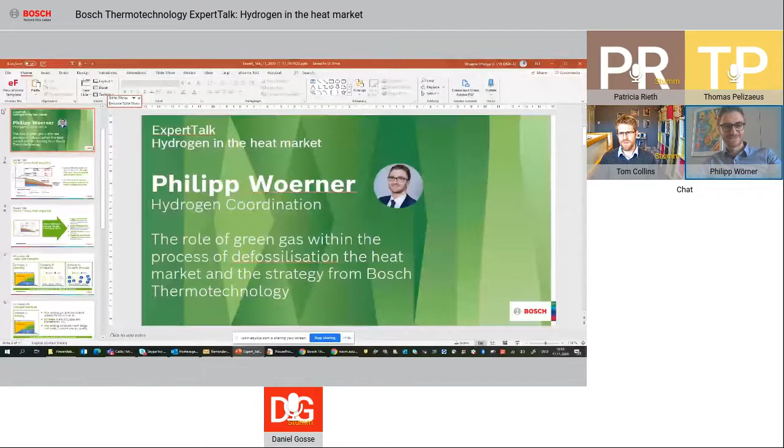So now it works. Yeah, I'm having the pleasure today to give you a little introduction into the role of green gas within the process of the defossilization of the heating market, and our special corporate strategy on it.

Let me start with the current Green Deal target line. On the screen you see now the current enacted target from the European Commission, from currently minus 40% to now minus 55% in terms of CO2 emission reduction compared to the emissions of 1990.

This new target setting has a significant effect, especially on the individual sector targets. In the middle you can see the new target setting now for the industrial and also for the residential segment. This means that the current activities, as we have defined for new build and also for renovation of existing buildings, need not only to be massively increased, but now also need to be accelerated at the same time.

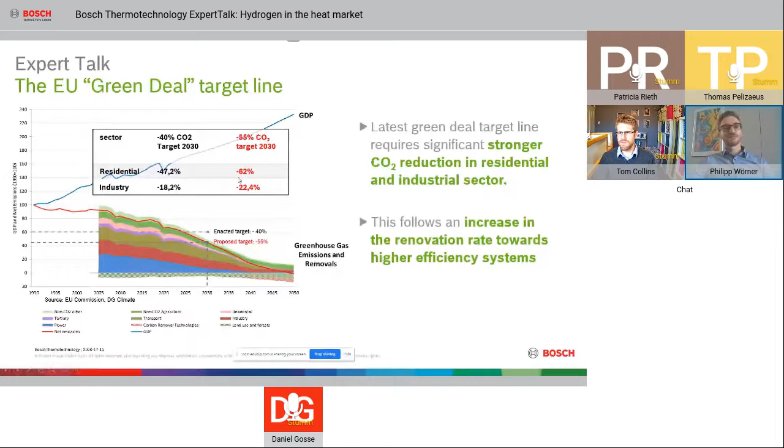Next to massive speed in the expansion of the capacity of the electrical grid, and of the demand to cope with the demands of space heating, industrial applications, and mobility, green gases, especially green hydrogen, have a great opportunity as a second energy carrier to be an active contributor in the decarbonization pathway.

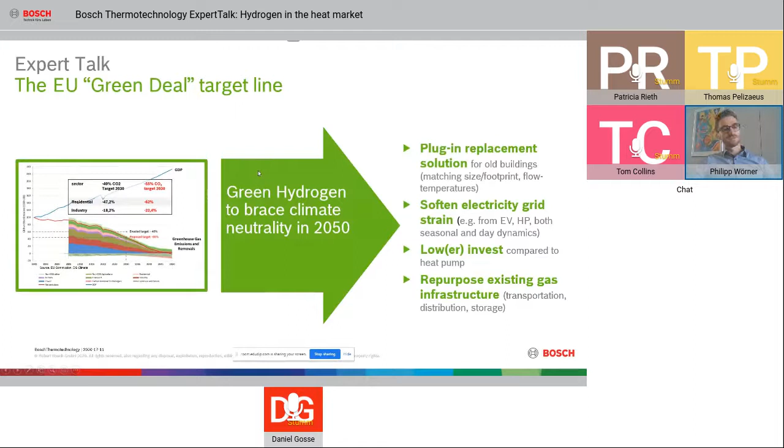Why? Renewable gases such as hydrogen can be used to decarbonize existing buildings, to enable an optimized use of the existing energy infrastructure. And we are able to offer plug-in replacement solutions, especially for the renovation of old buildings.

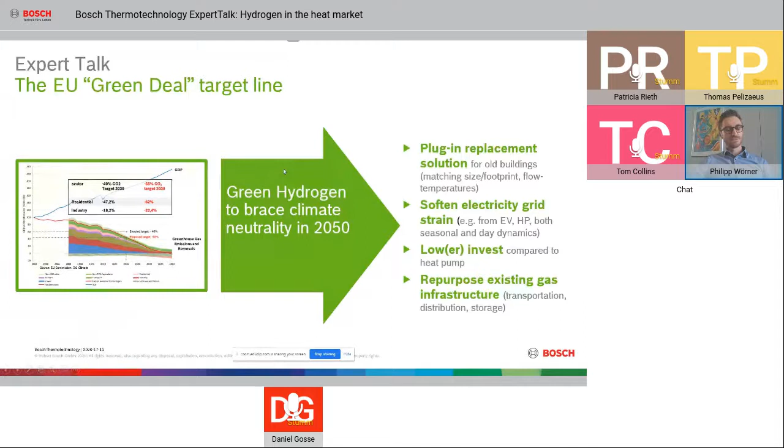Next to that, the repurposing of the existing gas infrastructure—here we're speaking not only about the end use, it's also transport, distribution and storage of green hydrogen. It offers a great opportunity to soften the electrical grid strain, especially at times of low wind and sun. On this slide, I want to give you a little overview.

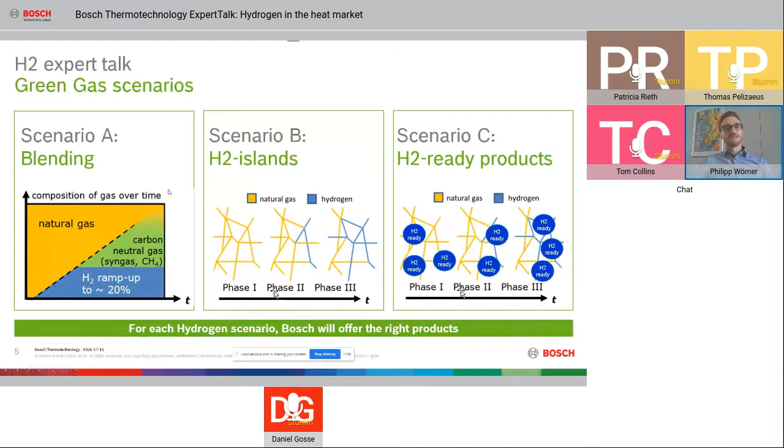How can we make use of green hydrogen or green gases within our industry? Let's start from the left to the right. Scenario A is the most simple one: you take the available hydrogen and mix it, like a cocktail, into the existing gas grid. Over time, you can increase the share of synthetic gases and biomethane plus hydrogen, becoming more and more carbon-free. The great advantage is we can use the existing combustion technology and certify it against the new gas quality.

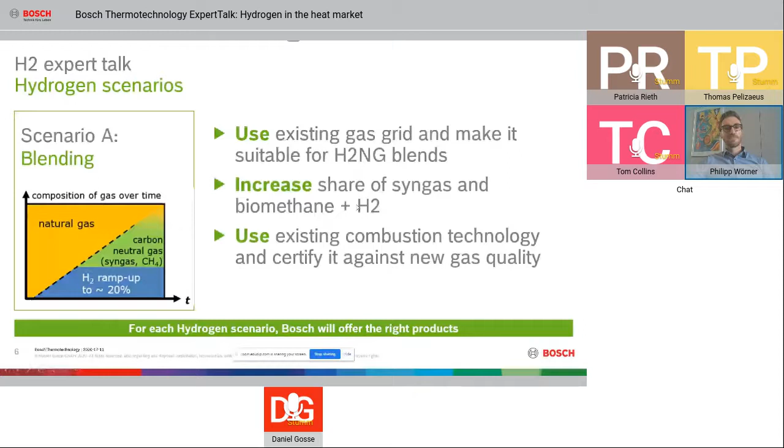In scenario B, we speak about so-called hydrogen islands. Here, a successive upgrade of existing gas grid sections takes place, converting them to local hydrogen networks. Over time, these islands are increased and enlarged step by step until we have a fully CO2-free area, and later the full market. The key challenge is that you have to absolutely synchronize, at the same moment, the hydrogen supply availability and the gas end-use installation. So everything has to be prepared together.

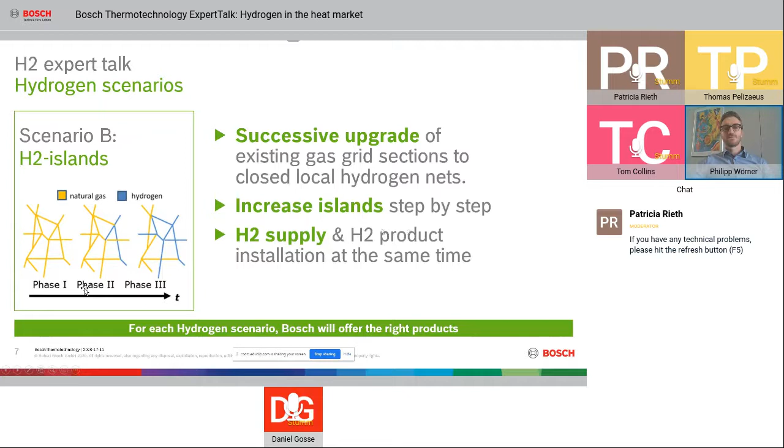Last but not least, scenario C—the so-called hydrogen-ready scenario. This is very important: the appliances are new technology, designed and released especially for combustion of pure hydrogen, but when installed in the field, they are converted to a natural gas setting. The great advantage is you have time for the grid and the hydrogen supply to be phased up, ramped up step by step. Then, when hydrogen is available in front of the door and the installed stock is prepared for hydrogen readiness, these boilers are simply switched.

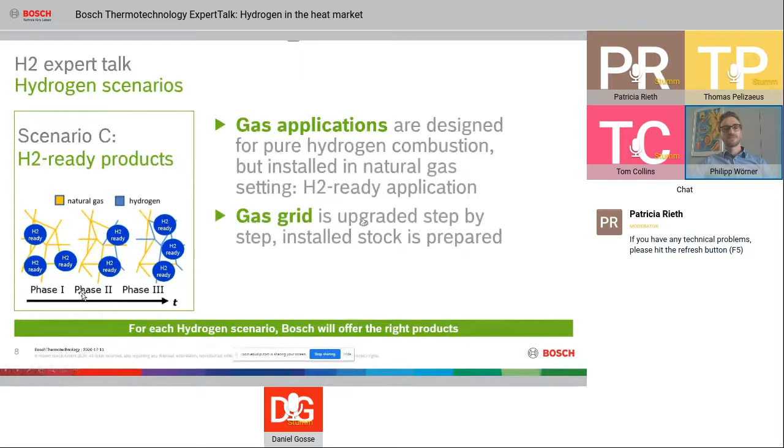Nevertheless, in all three scenarios, there is currently no clear winner yet in Europe. That's why we, as Bosch Thermotechnology, will offer the right products for all three scenarios at the right time. Let me show you now with this picture what plans we are following.

You see in the upper left corner the path of blending, mainly scenario A. I'm happy to tell you that even our installed products today, when younger than 1995, are already able to work with up to 10% hydrogen blends, so you can start decarbonization already from today onwards. Our modern combustion technologies are now, in the next step, certified for 20% hydrogen blends—so our next generation of products will be certified for that 20% hydrogen level.

Next to that, we will follow in parallel the path of pure hydrogen. Here you see directly a difference between countries, and yes, this is right: the UK is a little bit ahead of the rest of Europe. This is mainly because there is a huge interest based on the availability and capacity of the electrical grid, to have higher flexibility, which pure hydrogen could offer.

Therefore, we are participating in the public demo project Hy4Heat, and within this we also want to launch our first product range in 2022 with a small quantity. In response to a possible legislation change in 2025, we are aiming to launch a product range in hydrogen readiness as well. Looking more broadly at Europe, we see this step coming for 2030. We're working in parallel to prepare the certification pathway for certifying hydrogen-only boilers and hydrogen-ready products.

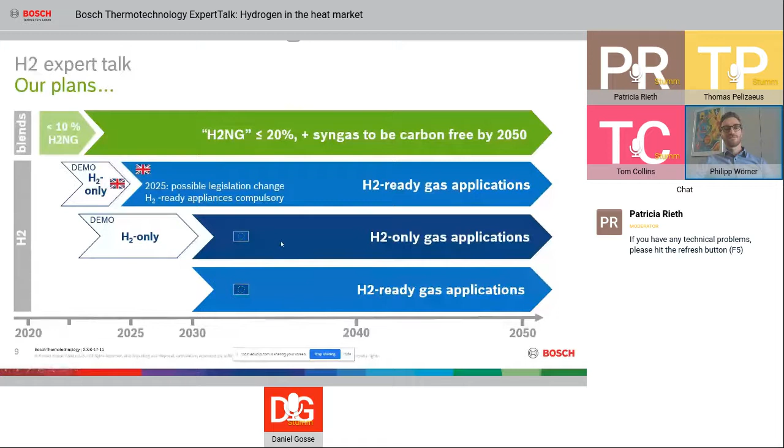But now, coming from this quite dry picture of our plans for the future to what we have actually already achieved, I would like to hand over to my colleagues. Thank you very much for this first introduction.

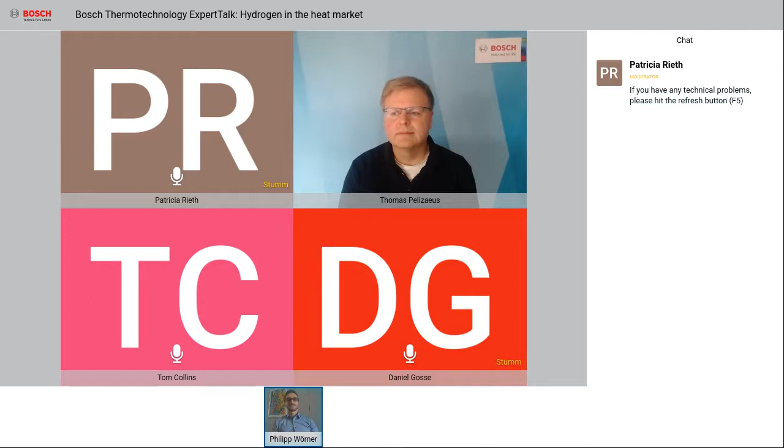I think we will later see in particular what the effect on the products will be. But let me start from this point: the hydrogen-ready concept is based on the fact that you can change the combustion setting from pure natural gas to hydrogen with just a few working steps, exchanging the burner and some software parameters. This will, in the end, determine the delta cost. But it's not yet clear whether these delta costs have to be covered by the end customer or by the local distribution grid operator.

Okay, thank you. We have another question. Is there any concern regarding introducing hydrogen to an aging, and maybe also failing, supply network? How long will it take to update the networks?

This is a question which we as Bosch Thermotechnology cannot answer from our perspective. We can just give our position: there is currently a lot of effort necessary. The grid in Europe as it is now is not fully prepared for 100% hydrogen, nor do we currently have the amount of green hydrogen available. But it's important that someone makes a start, otherwise we stay in this chicken-egg circle for much longer.

That's why our clear strategy is to provide the gas end-use side ready for hydrogen, and then give the other side, the gas supply side, the chance to upgrade the grid and produce enough green hydrogen so that we are able to use it and really start to decarbonize.

Okay, thank you Philipp. So then let's now turn to the use of hydrogen in residential applications. Tom Collins will share his experiences from the UK. Please go ahead, Tom. Thank you very much, Thomas.

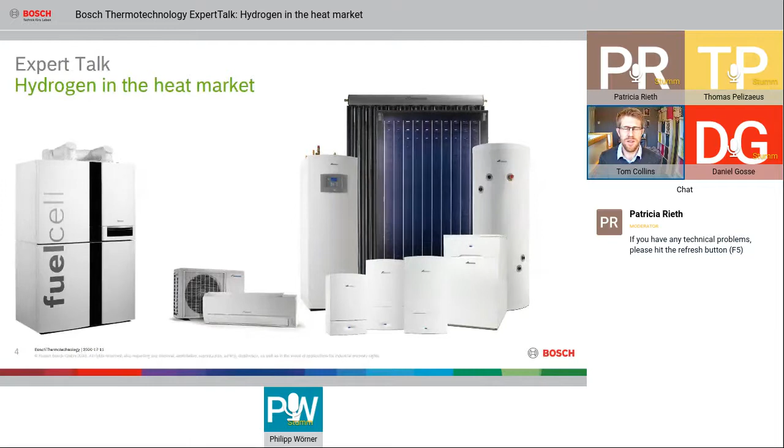All of these influences, plus capital outlay and uncertainty about how a system might perform, mean that despite our best efforts as Bosch to introduce heat pumps to the UK market, we've really struggled, and consumers still continue to choose boilers. This has been a pattern we've found ourselves in over the years trying to decarbonize heat in the home, and we still unfortunately just sell boilers. So the UK finds itself a little bit stuck. We can't live with gas and its emissions at the point of use, but we can't live without it at an end-use level, and also with some challenges at the energy system level.

This all changed back in 2016 when a report called Leeds City Gate was published. This was a desk study, a theoretical study, working out if it's possible to convert a large city, in this case Leeds in the north of England, from natural gas to hydrogen. The idea had been proposed for years beforehand, but normally dismissed almost immediately. But this report was a real game changer because it showed that actually it's feasible, if you model the impact on the network, the zoning of the network, and the materials present in the system.

That's partly because the UK, unlike a lot of Europe, has started replacing its iron gas mains with plastic, continuously welded polythene pipelines, and those are far more suitable for hydrogen than the old iron pipes.

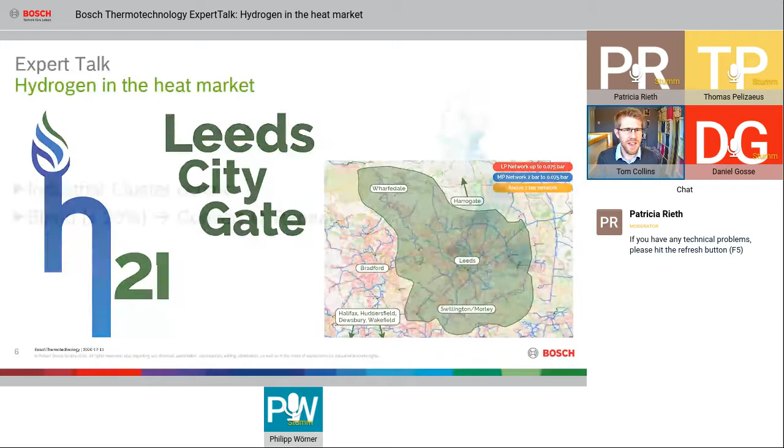So an emerging proposal in the UK is to start doing these conversions in large cities, working out from industrial clusters where hydrogen would be onshored, either produced or imported.

Key to this is blending. Blending doesn't just help you reduce the carbon intensity of gas early on. It also allows you to break the chicken and the egg problem in building large quantities of hydrogen production, because blending gives you somewhere to immediately start selling and using the hydrogen that you produce. Once you've built up enough production capacity, you can convert a region of the grid, transfer that hydrogen production capacity onto that new dedicated region, and then start again building more capacity. So blending is a real key technology, not only for showing early reductions in carbon intensity, but also for allowing us to break the chicken and egg problem in building large scale hydrogen production.

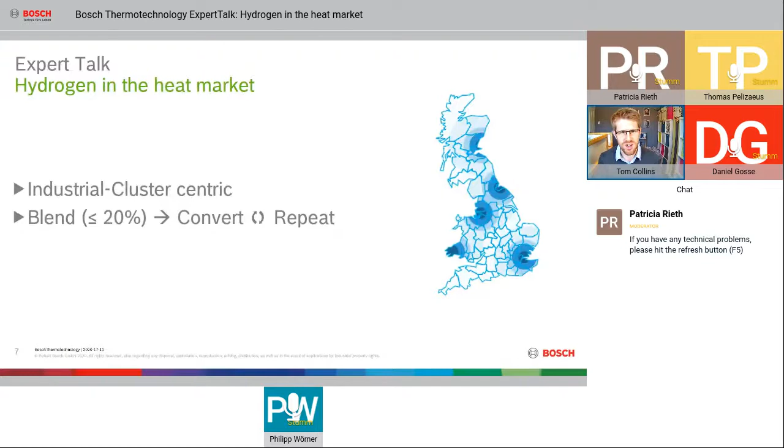The UK iron mains replacement programme not only means our network is very well suited for conversion, it also means some of the costs of a hydrogen conversion will already be dampened by what bill payers are already paying to cover this iron mains replacement programme. So the impact on bills of that Leeds project, for example, would have been just £10 a year for the end user to pay for that conversion.

It's not particularly surprising that the UK finds this a much easier prospect than other European countries. In the 1970s, we converted our entire gas distribution network from Towns gas, which was 50% hydrogen, to the North Sea natural gas that we're using now. So in a sense, for the UK at least, switching to hydrogen is a little bit like going back again. We're going back to the future.

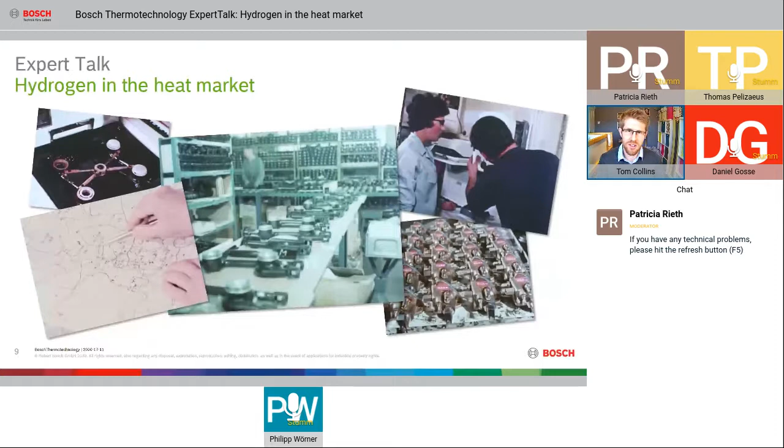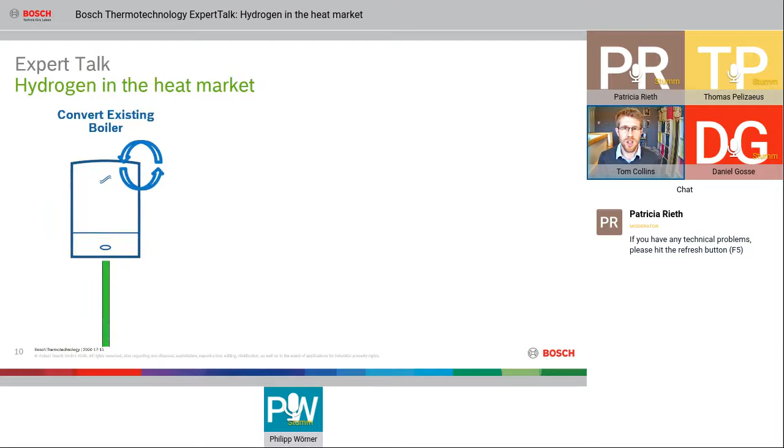So how do we go about this conversion, particularly in terms of technology? Well, the UK government, when they first started consulting on this, proposed three different methods of converting appliances. The first was what we did back in the 1970s: change a few parts in a boiler, and once those parts have been changed over, the boiler can burn the new hydrogen gas. For some reasons I'll explain shortly, that's not particularly possible.

The next proposal was actually what was modelled in that Leeds report, which was to simply replace the boiler with a new hydrogen boiler at the point of conversion. Now the macroeconomics of that, maybe surprisingly, are still quite attractive. But if you look at the impact on a local level, if you suddenly renew all the appliances in an area, the small one-man-and-a-van operations currently installing, servicing and maintaining boilers would really struggle if we suddenly renewed the whole population in one summer in their local area. So not so attractive locally.

The third option the UK government proposed was to build boilers you could convert across to hydrogen almost automatically, at the flick of a switch. Again, that's perhaps a little technically optimistic at this stage. So we had three ways of doing this conversion that seemed like good ideas, but none of those options worked very well.

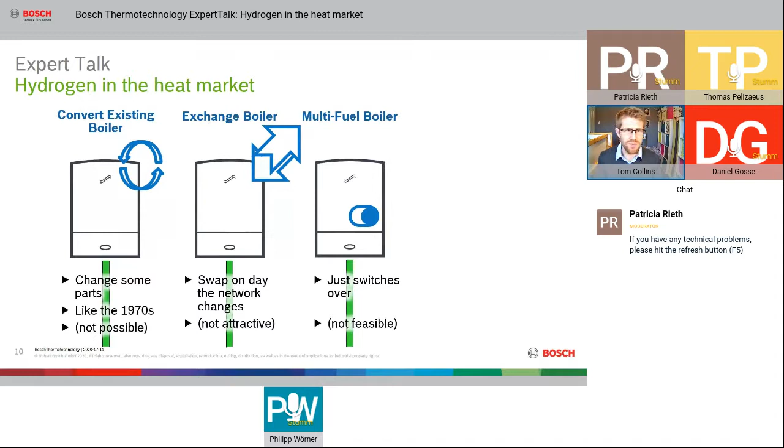All credit to the UK government, when industry proposed a fourth method, they went out and reconsulted on it. That fourth method was to build a boiler that's essentially a hydrogen boiler, but back-convert it to natural gas in the factory, and sell it as a natural gas boiler that's hydrogen ready. That boiler can be converted just like we wanted to in the first place, by just changing a few components. So hydrogen ready, that definition of hydrogen ready appliances, seems to be the one that's got traction.

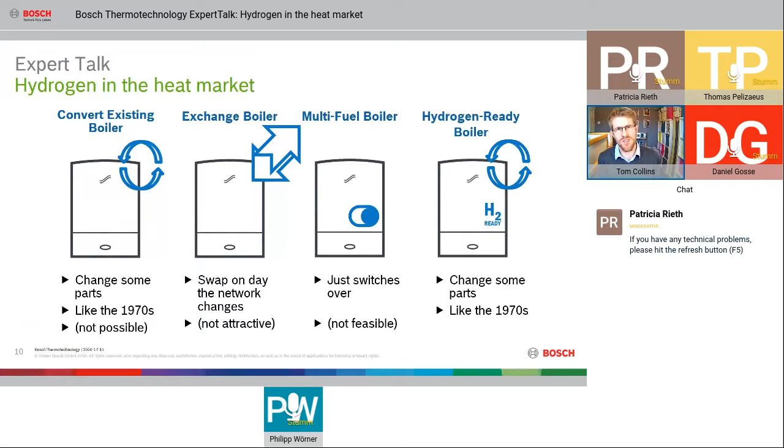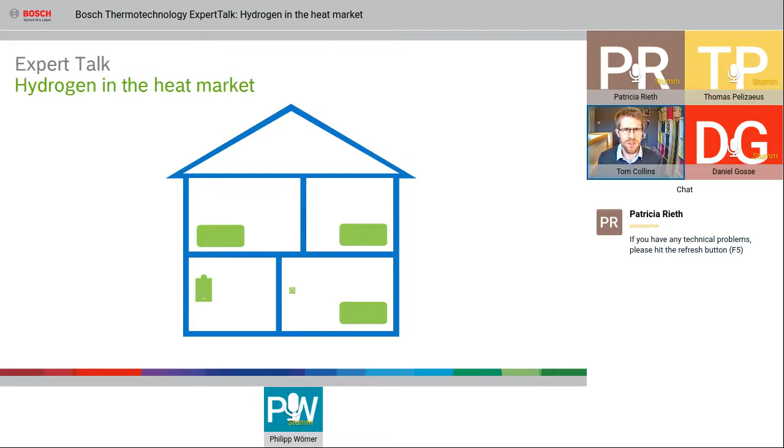It allows us to build the cost of the technology change into the natural life cycle of the appliance. The parts that would be changed would probably be the burner, maybe something associated with gas mixing, and maybe some kind of coding for the boiler to know what gas it's burning. Our life cycle replacement programme makes this look really simple. When your appliance naturally reaches end of life, you replace it with a hydrogen ready, direct like-for-like replacement appliance. And when the day comes that your gas pipes are changed over to the new gas, a few components are changed in your appliance in an operation that would perhaps take less than an hour, and your house is now burning green hydrogen. So what's inside a hydrogen ready appliance?

For us, we've used our modular architecture of appliances that we have at Bosch. And so most of the boiler stays completely identical to a natural gas boiler.

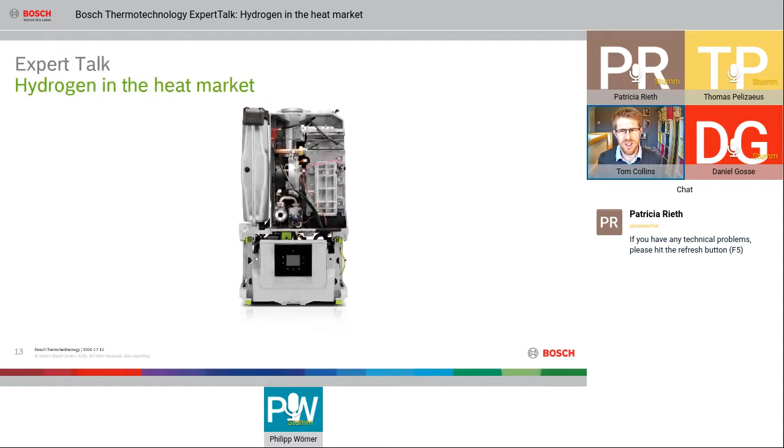Where the changes happen are just in this module here, where we burn the gas and air mixture together. Inside that module, we've made a few changes, and we've faced a few interesting challenges around hydrogen. I'll take you through just a few now.

The first one is how you burn the gas. So this is the burner. This is the heart of a modern pre-mixed appliance. And here is a flame.

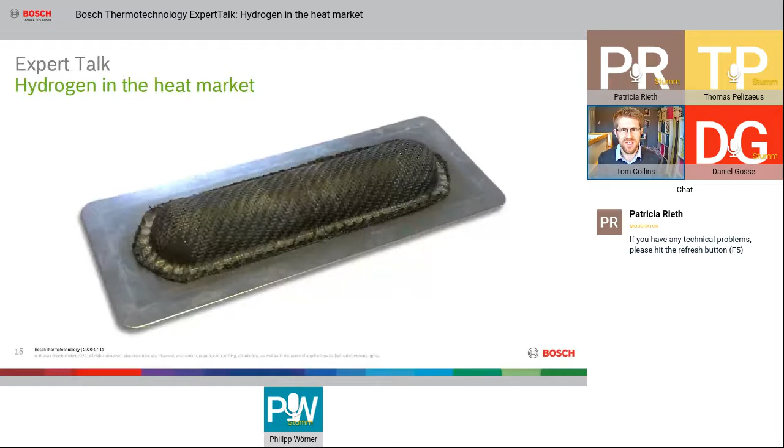If you look carefully at one end of this flame, ready, steady, now, you may have noticed the flame got shorter, and the burner started to glow a little bit brighter. Have another look at the flames at one end. See if you can see them go shorter now. And you may have noticed the burner deck started glowing.

What's happening here is that hydrogen has a higher flame speed than natural gas. So the flame is burning against that flow of products through the burner faster. As you get a gas with a faster flame speed, the flames burn closer and closer to that burner surface, as they're able to outstrip the speed of the gas squirting through that burner.

If we introduce much more than 23% hydrogen, as we've got here, perhaps above 50%, the flame would be able to propagate back through the burner. It would win the race against the flow of products through the burner, and you'd light the mixture of air and gas upstream and create a kind of pop. That's called a flashback. It's a bit like a car backfire. It's not dangerous, but it's something we have to avoid.

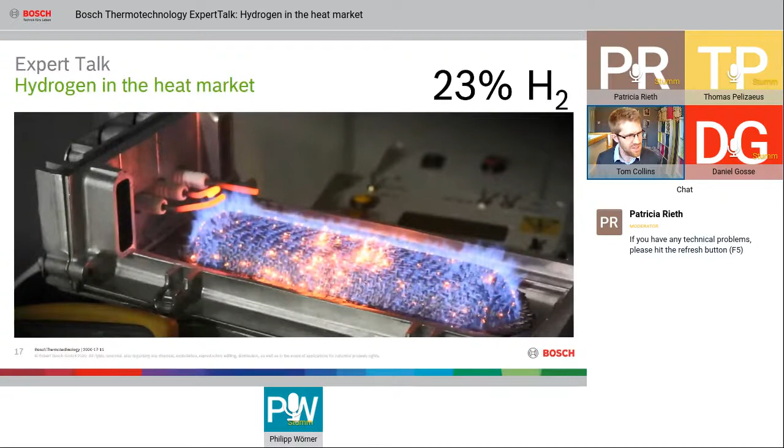So that's one challenge that we've overcome in our hydrogen appliances. Another really interesting challenge is how you detect a hydrogen flame. In a natural gas appliance, we detect it electrically because the flame conducts an electrical current, but hydrogen doesn't do that. Hydrogen flames are also, incidentally, almost completely invisible.

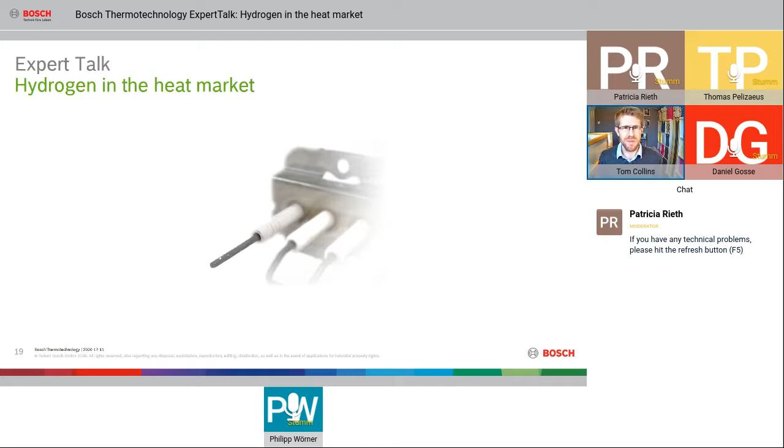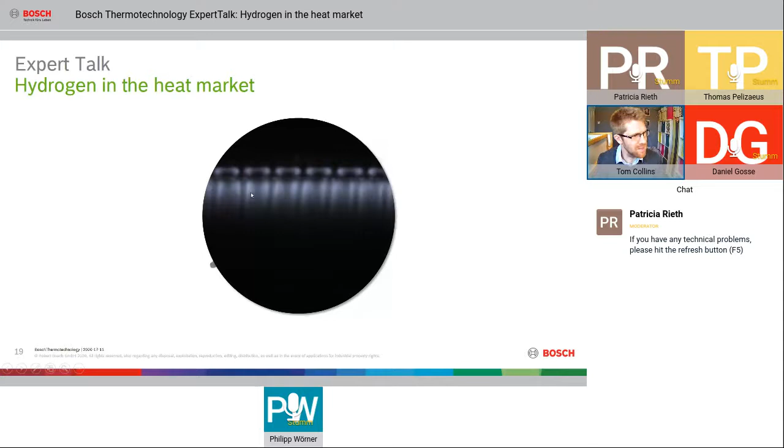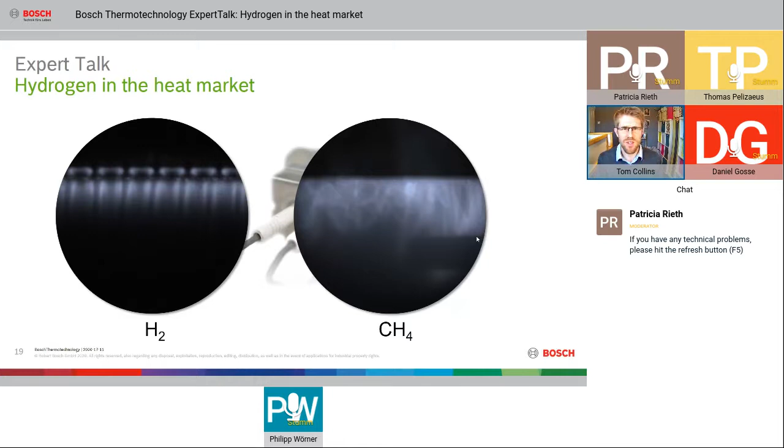And here is, don't worry about this, a natural gas flame. It looks different because it's a different burner, but we can also see it in the same way. So ultraviolet is one of the range of methods we have available to still detect a hydrogen flame.

So that's a couple of interesting challenges that we've been addressing in our hydrogen ready appliances, a little bit of an insight into the technology. There have been many others, and hopefully in the future we'll have a chance to talk through some others.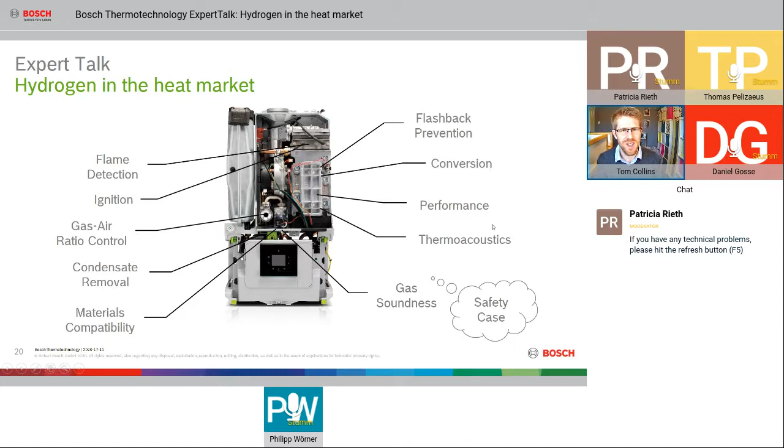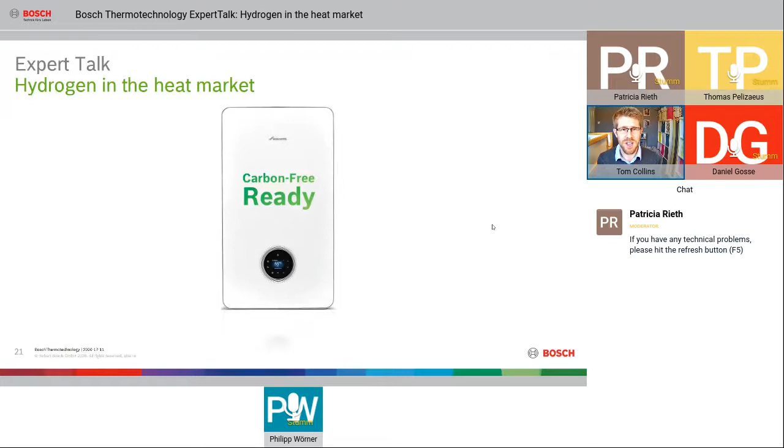Just one final update from me, a couple of interesting insights. One is that we've discovered that the hydrogen ready appliances are remarkably low NOx. So that's a really good outcome, that we can clean up air with hydrogen as well as defossilize energy.

We've just in the UK started running a demo trial outside of our labs. We have a boiler installed in one of these test houses, and that's been heating the house for a month and doing a great job. We're really excited that the technology is really coming to life now and operating outside the lab. Thank you very much for your time.

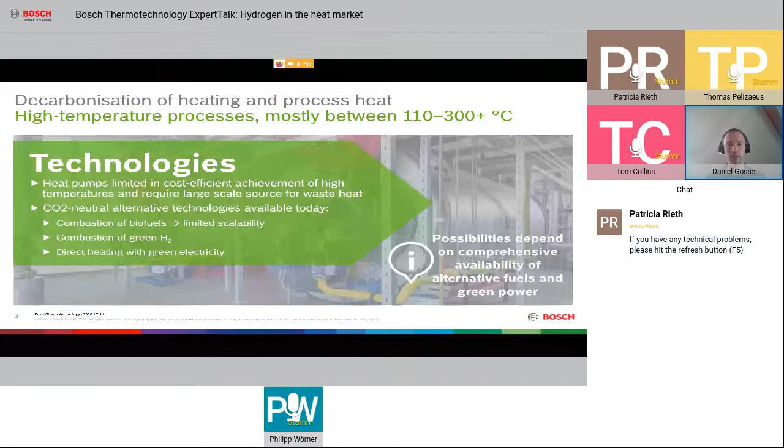When we look at decarbonization, defossilization, we must acknowledge that about 45% of primary energy consumption, for example in Germany, and the CO2 emissions result from commercial industrial applications. Half of the energy they are using is for thermal processes, 53% to be exact. That means there is a large potential of CO2 emission reduction.

But there are also challenges, because I'm often asked the same question as Tom: is it hydrogen or electrification?

I always have to say it will be both, in my opinion, but hydrogen will play an important role, because you can store it much better and in higher power density than electric energy, and it will be available from storage when there is no wind blowing and no sun shining. So therefore, in my opinion, we will see a mix of the different renewable energy sources, and hydrogen, due to its storability, will be very crucial.

Often the question is asked, why don't you use heat pumps for high temperature applications? The problem is we are limited in the temperature range. There are very few high temperature heat pumps, and they require a high temperature waste heat source. So when I have a heat pump that can manage 50 Kelvin temperature hub, if I want to achieve 300 degrees, I need 250 degrees of waste heat available. Who has this? The other problem is you need special refrigerants and eventually multi-stage heat pumps. So for large systems in the high temperature range, electrification rather relies on direct electric energy use, and this is, of course, very expensive as a primary energy source.

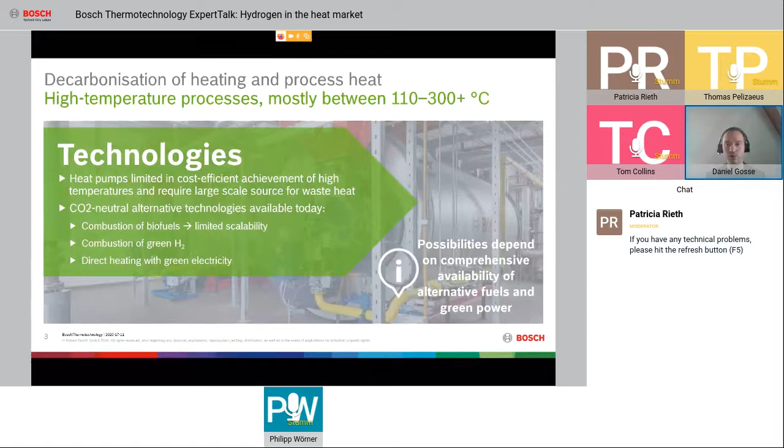So let us look a little bit into the technical details. What are the differences? Before that, I will show you some practical applications where we are already using 100% hydrogen in several factories and district heating applications.

The really cool thing about hydrogen is if you burn it, you don't create CO2, but water results as flue gas. That's a really cool thing. What you have to look at is the volumetric heating value. Hydrogen has a very high energy density by weight, per kilogram. But by volume, it's only 1/3 of natural gas, meaning no problem—we just need to put through 3 times as much volume of gas if we use it in gas form, what we are doing in the gas grids.

The flame temperature is a little bit higher, therefore we need to take measures to ensure there is no additional thermal NOx resulting, but there are several technologies available. For example, flue gas recirculation, or as Tom just showed, surface burners, with which we can achieve really good future-proof values and have a very clean flue gas of pure water steam.

Nevertheless, hydrogen also burns a little bit quicker than natural gas. We already saw this in the flame that was coming closer to the burner. Therefore, we need soft ignition measures. We also use flame protection devices for hydrogen, meaning they can avoid a flame going backwards into the system. We didn't see any of this happening, but we have it as a precaution because it's a new technology, and for Bosch, safety is crucial and important.

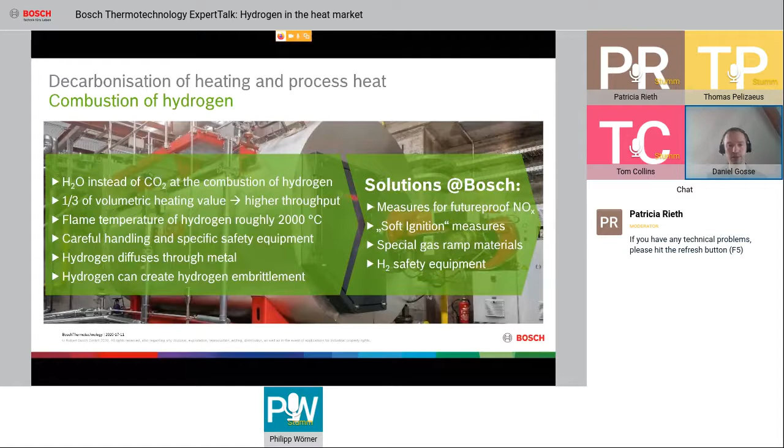What are we offering at the moment to commercial and industrial customers? On one hand, hydrogen firing. But not everybody has 100% hydrogen, especially when it goes to the megawatt range. What are we doing technologically there in the product? We are oversizing the boiler and the combustion part because, as I told you, you need higher throughput of gas and air. To achieve this, we oversize the boiler body, and we have slightly stronger fan blowers on the burner. Mostly we install an external recirculation because for very large boilers, it's difficult to implement a surface burner.

But many customers already tell us: I have natural gas available now, I know I will have hydrogen in the future, but I'm installing a boiler now and will operate it for 30 years—I need to be future-proof. What can I do? In this case, we offer hydrogen-ready boilers, meaning the boiler and the combustion dimensioning are already suitable for hydrogen up to 100%, and we equip it with a multi-fuel burner, for example.

There was a question regarding prices before. For the big industrial boilers, the burner for 100% hydrogen combustion is about double the price of a natural gas burner. And the boiler body is about 10% bigger, meaning about 10% higher price for the boiler itself.

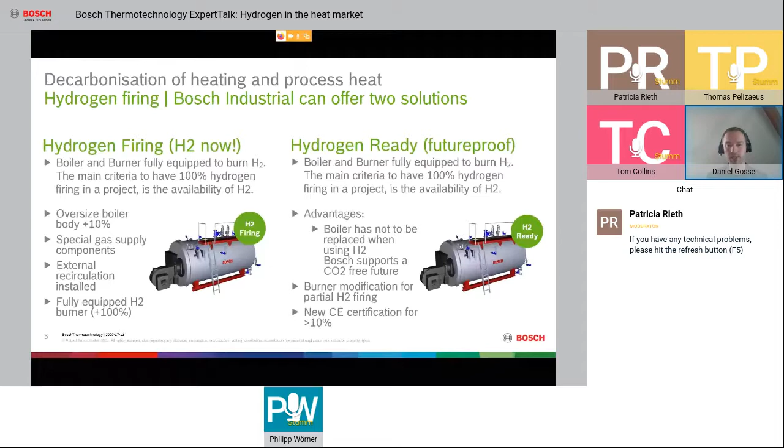But be aware, if you want to introduce more than 10% of hydrogen into these products, then you need a new CE certification. But these are individual products. Each boiler is produced only one single time, and therefore this is no problem.

I promised to show some practical applications. This is one of our first hydrogen projects. It's a pharmaceutical company in Switzerland running a 20 ton per hour steam boiler at 13 bar. For this company, reliability is key. Therefore, they have a multi-fuel burner that can operate with natural gas or 100% hydrogen, which they receive from processes - so to be honest, no green hydrogen. As a third backup, they even have light oil, but that's only a worst-case backup in case there's a problem in the entire gas grid of the area. They are running a process where they would lose lots of money if they didn't have process heat available and would have to dispose of what they're currently producing. Therefore, in this case, a triple fuel, very special solution.

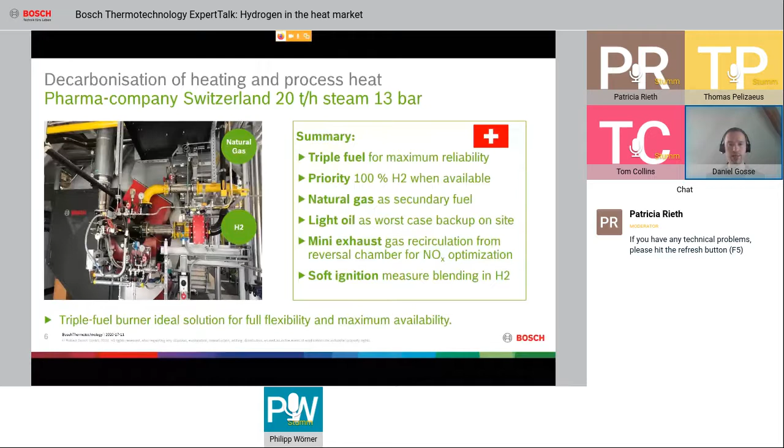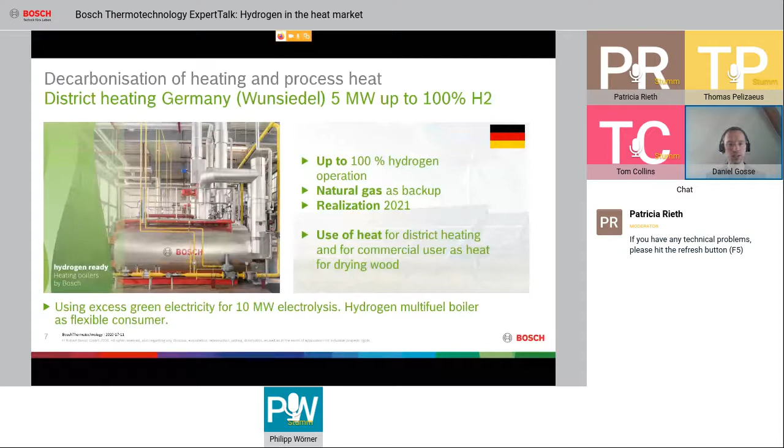Let me give you another example. This is a district heating example from Germany. The municipality is erecting a 10 megawatt green hydrogen electrolysis machine together with Siemens, and installing a district heating boiler that's also used for commercial applications like drying wood. In this case, they have a 5 megawatt boiler, and they can implement the hydrogen not just for this boiler, but also for mobility and other users. The boiler is a very good application to use the additional hydrogen that they can't use in other applications, so they gain lots of temporary flexibility in managing their resources.

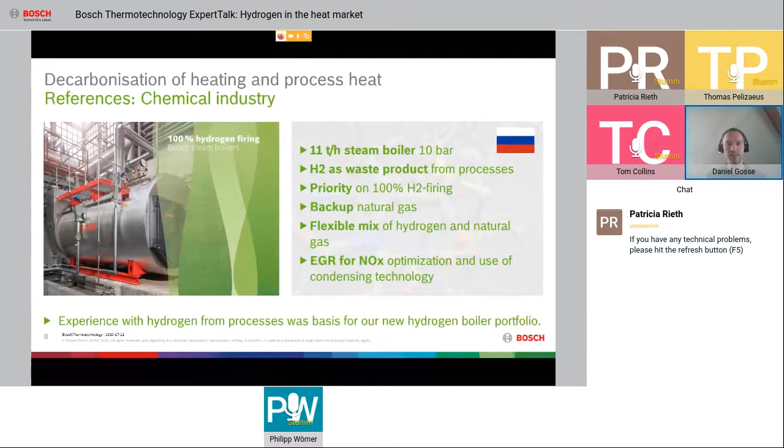That was also a very important project for us to gain experience on blending - how do you ignite hydrogen in a very safe way? So we learned a lot and are now looking forward to more projects with green hydrogen. There are some pilot projects running at the moment. Let's see which of them are realized.

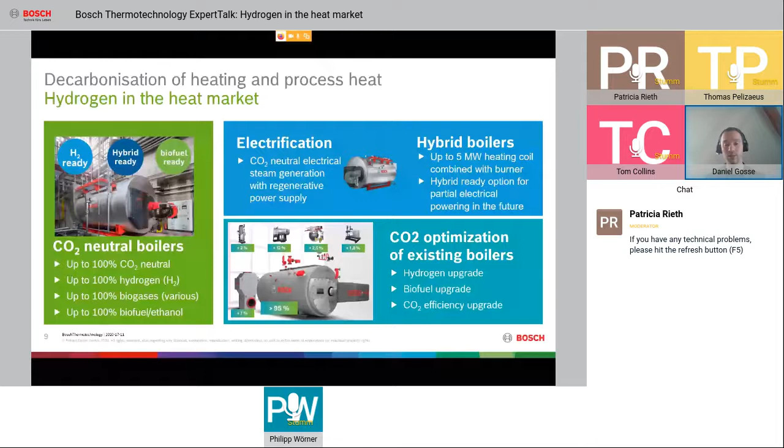Nevertheless, at the end, hydrogen won't be the only answer. In my opinion, it will be a mix. We will see hybrid solutions with electric direct energy use, also together with hydrogen or, for example, biofuels and biogases. And of course, we will also see CO2 optimization of existing boilers and upgrades of existing boilers to CO2 neutral fuels. That altogether will play an important role in, in my opinion, the already close future. Thank you very much.

On a technical question: is excess heat from the electrolyzer also used in the use cases you have shown? In this case, no, because the necessary energy level that is used is not achieved.

The second question is, why is it attractive to use hydrogen in industrial applications when you consider efficiency across the whole supply chain from generation to usage? Yeah, that is something often forgotten. When I convert green electricity into hydrogen, I already lose somewhat 30% of efficiency. But what is the problem? If I have green energy that is free and I have more than I can use, then why shouldn't I put it into creating hydrogen that allows flexible use later? So therefore, in my opinion, in many industrial applications we will see hybrid boilers, as I just showed, with an electric heating coil used when green electricity is available, and at night when there is no wind, we will additionally use the hydrogen. So this, I think, is the best solution that integrates into the total usage of hydrogen.